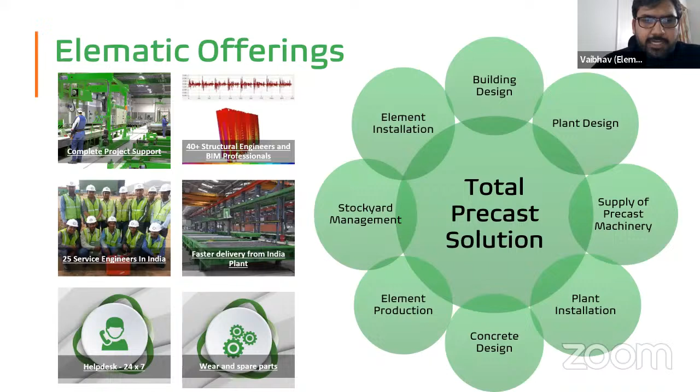And the core machinery with respect to the technology part, where it's a concrete distribution system or an element distribution and transportation system, that technology part is coming from Finland. In a combination of technology and the mold, we are supplying the total precast plant to the customer. And obviously, we also have a 24/7 help desk and other after sales support as well.

So in India, we have engineering and BIM offices in Gurgaon, Pune, and Hyderabad. In Gurgaon, we have the office, and in Pune and Hyderabad, we have team members who are working from home. So we have a presence of the design team in these 3 locations. Marketing presence as well in Delhi, Bangalore, and Hyderabad. And that way we are able to cover across India. And the plant is based in Alwar, Rajasthan. Also our service team and supervision team is stationed in Delhi and Pune.

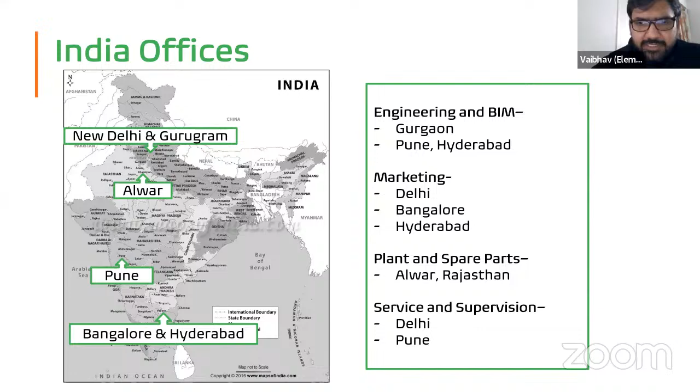So as a design team, for any building to be a good design, to adopt the technology in the right way, it is important to have a strong structural engineering team behind this. Our design team, who are major lead structural engineers, are all graduates and postgraduates from premium colleges like IIT. Together we bring 40 plus years of industry experience, especially in precast. So that's how we are able to serve the customer.

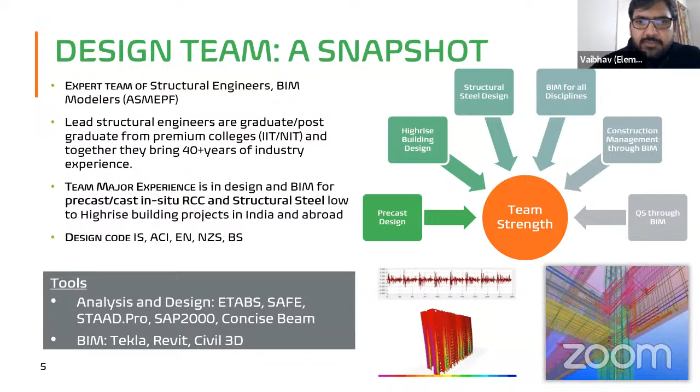Our team is also doing Indian projects as well as overseas assignments. And we are all equipped with the latest technology and the software licenses. So we are doing precast design services and BIM services. Other than the precast, we also provide the BIM services for the project.

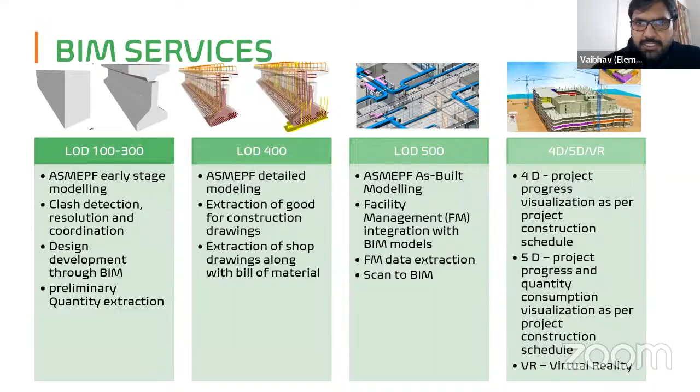Now that was all a brief about the company, what we are doing and how we can support our customer. I'll come to the precast solution that is available and how anybody can adopt precast for the project. So let's understand this precast concrete. As a precast, there is offsite manufacturing.

Broadly, we can divide this activity in 2 ways. One is the offsite, the other one is the onsite. Now in offsite, we are producing all the elements for the buildings. These are all load-bearing members: column, beam, slab, staircase, wall, all being produced in the offsite setup. That is your precast plant. So you're producing those elements there, curing them there itself and storing them for some time. Afterwards, you're transporting those elements to the site, and then the installation is being done through the cranes, and then the building is finished. So these kinds of 6 stages are involved in precast construction.

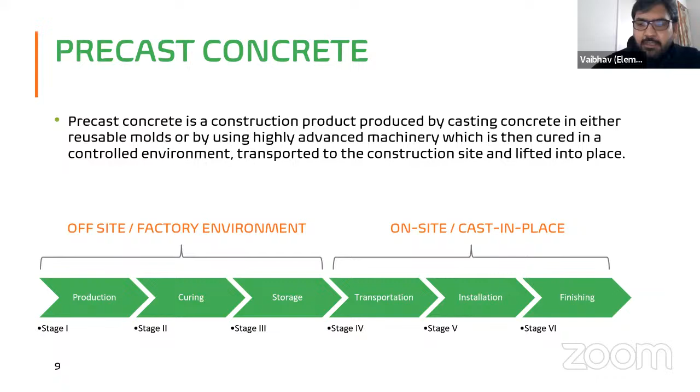Now, typically this question always comes to mind: are there any limitations with respect to precast? I would say there are no limitations in terms of what kind of project it is, whether it is a residential, commercial, or industrial building, mid-rise, high-rise, or in public works. We have been seeing this for more than 10 years now, that in all the metro projects, it's already being utilized. So precast has got no limitation.

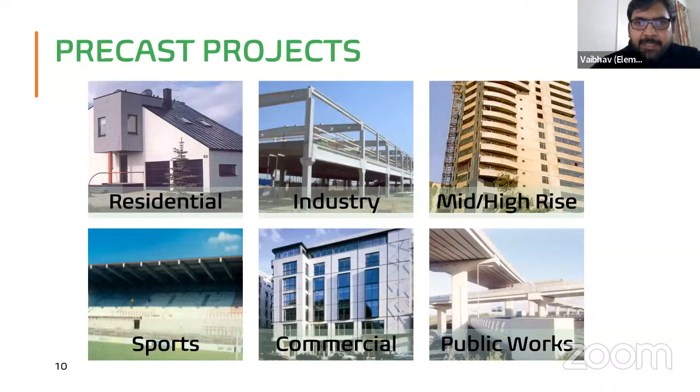It's all about what kind of plant setup and capacity you have. Then it's also about what kind of crane capacity you have at site, and the logistics part of it. As far as these 3 things are taken care of, you can do practically any building with precast, because in terms of engineering, we can design any building with precast. All the connections can be designed accordingly, and any project can be done with this kind of technology.

Now moving forward, typically if we divide the projects, we can simply say there are projects which are residential or which are non-residential. We make this differentiation because in residential projects, you'll see that there are a lot of infill walls. That's what makes them a different type of design solution, because we want to take advantage of those walls as a load-bearing member. So rather than going with the column beam slab system, we can make the same infill walls a load-bearing member as well. At the same time, that will also act as a partition.

So in all the residential projects, the suitable precast system is that we go with load-bearing precast wall, then we have precast slab, and then staircases. And majorly, you would only need these three elements to do the residential building in precast.

And the facade of the residential building is also one of the characteristics of a residential building, that you have to have a facade which doesn't require too much maintenance over the period of time. Because after 5 years, 6 years, you see that conventionally in some projects, plaster is falling off, or the paint has gone bad. So you have to do the repaint, you have to do a lot of repair work. So this kind of facade can be done as an inherent part of the precast element.

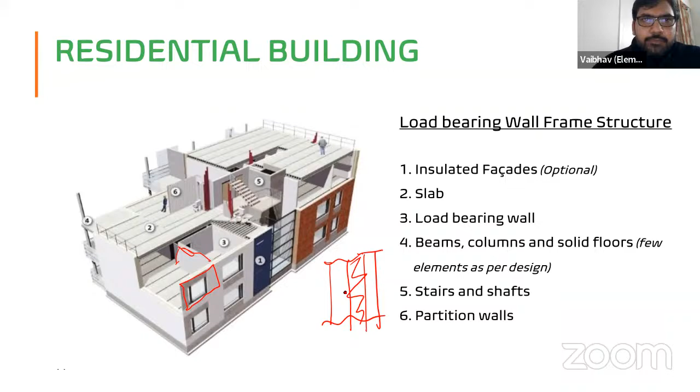So that was about residential. Now with respect to non-residential buildings, it's about column beam structure. If I talk about an office building, typically my column to column span is varying from 8 meter to probably 11 meter or more. So that is the trend that is happening in all the commercial buildings and office buildings.

So in this kind of architectural requirement, we go with the precast column, beam, and slab system, where one solution is that I can provide the lateral support with respect to all the earthquake forces and wind forces by the central core, or wherever I have the walls available. So generally in a commercial building, you'll have a lift core, you'll have a staircase core wall area, and those walls basically will take care of all the lateral load resistance for the building.

And I can design my column and beam where the column is precast, the beam can be precast pre-stressed, and then I can have the hollow core slab again spanning 8 to 11 meter or more as per the project requirement. So this slab, beam, and column system would be purely designed for gravity load transfer. And for lateral load, I am able to take care of 100% of the lateral load by the central core or by all the shear walls that are available in the project.

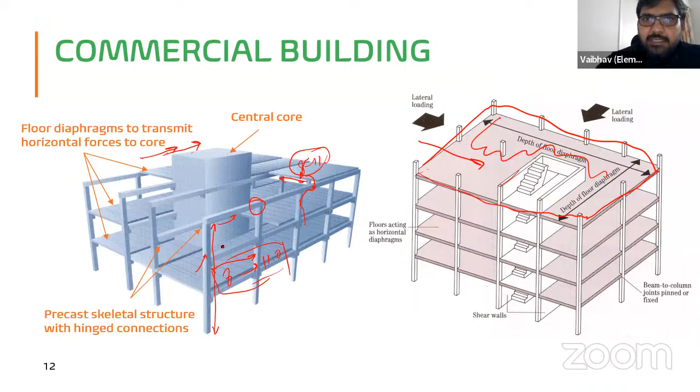Now, other type of building, other than residential, non-residential, we can say they are industrial building. I mean, there have been a lot of demand for this kind of projects where there is a warehouse project or a factory project. Typically, these are being done with PEB structure in steel, and the pure reason to go with steel is because of speed of construction.

So even those kind of buildings which are actually single story, but their characteristic is that they are like 10 to 12 meter kind of a high single column. And when we want to do it with conventional cast in situ, obviously the formwork and everything becomes too complicated, and we are not able to achieve the speed of construction. But this kind of a buildings can be very well done with precast solution.

So one solution is that we do 100% precast right from foundation till the roof, where there could be two ways of doing it. One is that I can have again the perimeter of the warehouse or the industrial building with the load bearing wall. Below also I can have precast foundation, pedestal, and beam kind of a structure, or I can have a precast strip footing divided in pieces, and then I can start my pedestal wall, and then from there the load bearing wall. And internal I'll have again column beam structure with the span whatever is required. Generally this span can be again probably around 16 meter or so.

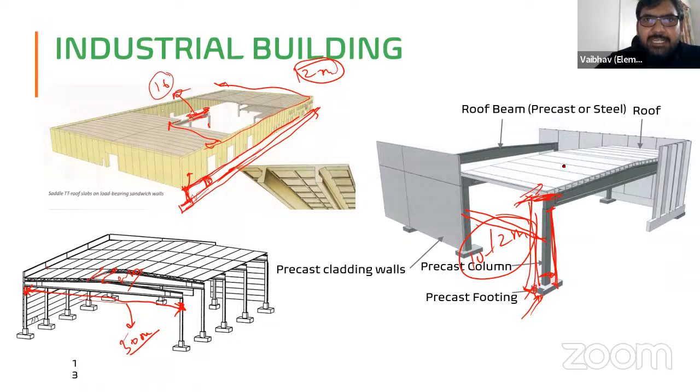So typically, if you see, we have talked about all kind of building projects, and you'll see that in all the building projects, my type of element is only 5, so to say. So one is the slab, other is column, then we have beam and wall and staircase. So you just need 5 elements. And the precast factories are not really project specific, because this is also sometimes a notion that do I have a factory only set up for a project? No. You can utilize your factory for any kind of building project.

Eventually you're going to use these 5 elements, and these 5 elements' molds are quite flexible, and this flexibility provides utilization of same molds for various kind of projects and various size of buildings and elements. There might be some restrictions, like with respect to staircase, you might say that, okay, this tread and riser I have to fix, but number of steps can be variable. So those kind of slight limitations would be there, which have to be thought through. Otherwise, there is a lot of flexibility.

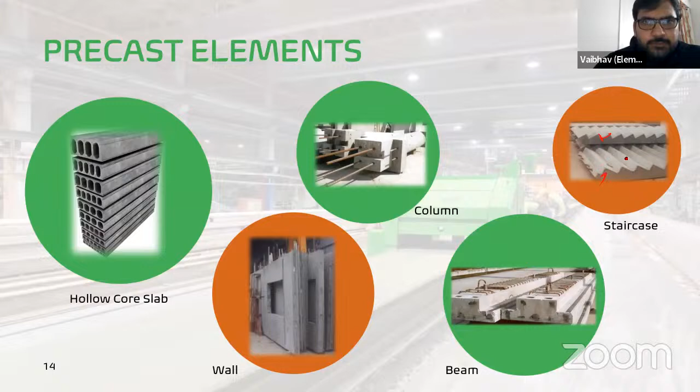Now, with respect to slab solutions, we can typically divide precast slab solutions into 4 parts. One is the hollow core slab, which I would say is the most advanced slab solution to date. This is basically a pre-stressed concrete product where we have removed the concrete where it's not really required in a slab. So we are making the slab lightweight, minimizing the concrete consumption as well as the steel consumption with the pre-stressing. So the hollow core slab is a wonderful product which can be utilized anywhere.

Then we have a double T slab. Double T slab is, I would say, a combination of a thin slab with 2 beams, as you can see. This is also again a pre-stressed product and can cater to up to 30 to 40 meter spans as well.

Then another solution is the half slab. Now, with respect to half slab, it can be a normal reinforced half slab, or it can also be a pre-stressed half slab. You can consider this as half precast and half cast in situ, which is done at site. So this bottom precast portion also acts as a formwork. We just have to place some props below the slab while we are doing the balance cast in situ half at site. This half slab solution is utilized quite commonly in residential projects, where you want to go with the room size slab concept, where practically all my walls are load bearing walls.

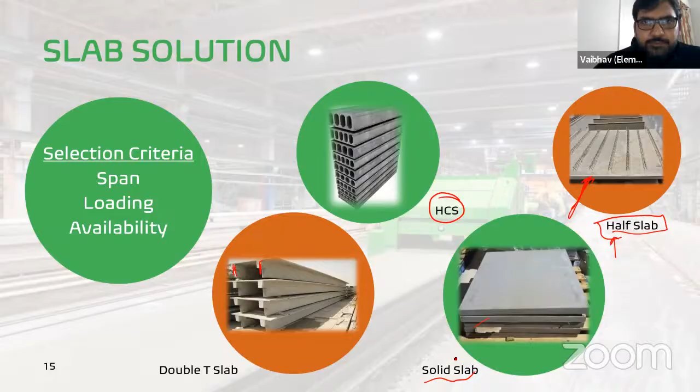So this was all about the structural scheme, the kind of precast elements that are required. Now I'll touch upon the connection part, because that is also quite a common question in everybody's mind, how these connections are and how they will behave. First of all, before I get into this in detail, I want to explain that all these connections we use are tested connections in the laboratory. They have been tested in the US, in New Zealand, and most of the connections are now also being tested in India. And it has been found that the performance is either equal to or better than cast in situ construction.

If I divide these connections in terms of their load transfer capacity, we can term them as a moment connection or as a hinge connection. And accordingly, as per the analysis of the building, we have to see the amount of forces that is coming, and we have to design these connections. But in terms of detailing, these details are quite well known, and they are given in the literature and in the codes as well, and that's how it's being followed. And these have been tested.

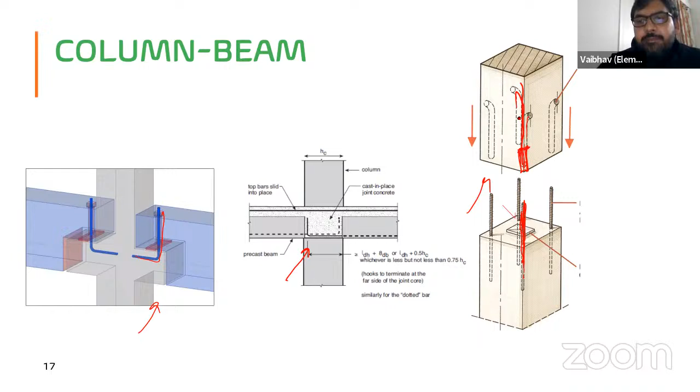Then this is one connection detail where column to column is being connected. The bottom column has reinforcement projecting out, and that goes inside the column above, which has a dowel tube. And then this connection is grouted with non-shrink grout. So this is a typical connection detail for column to column. Now this can also be replaced with a grout-based coupler, where I can have similar dowel reinforcement coming out from the column below, then a grout-based coupler, and then a bar starting again.

Then with respect to wall to slab connection, it is also similar to what we have seen in the column to column connection: there would be reinforcement coming out from the wall below, and it goes inside the dowel tube above. And at the same time, we have to connect my wall with the slab diaphragm. So in all these slab solutions, especially for any structure which is more than 3 stories, we have to mandatorily have this RCC topping, which is also mandated by the code.

So this RCC topping is also acting as a diaphragm for my floor plate. This diaphragm is connected with the reinforcement coming out from the wall. There is one reinforcement bent inside the diaphragm, and this is how the slab and wall is connected.

So in this connection detail, if you see, this is an external wall connection. You have a wall to wall connected through this dowel tube system. One reinforcement is bent inside this, and then this gap is filled with the grout, and on the exterior we have to put

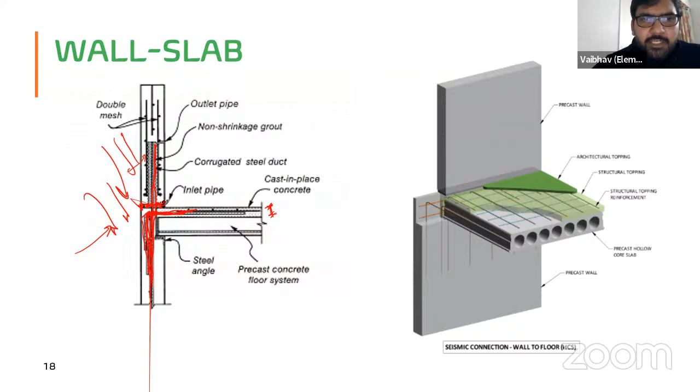backer rod and sealant. So this sealant is basically for protection against any possibility of seepage because of heavy rain and all. So you can see that there's a sealant, then there's grouting done. These two things really eliminate any possibility of water intrusion.

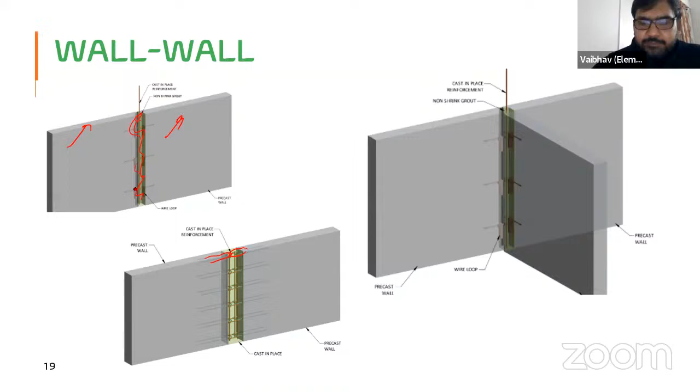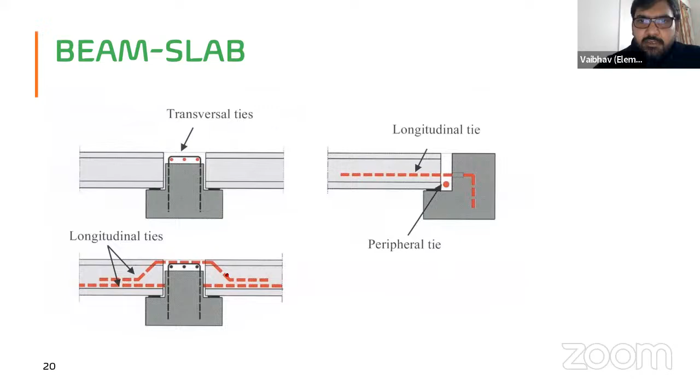So the whole purpose of showing these connections to the forum is to understand that all this precast design information and knowledge is available. It's already given in the Indian codes as well. There are some mandatory requirements which we all have to follow, and that's how we ensure that the building is behaving as good as a cast in situ building, or even better in terms of any kind of seismic load situation, or also the smooth transfer of gravity load.

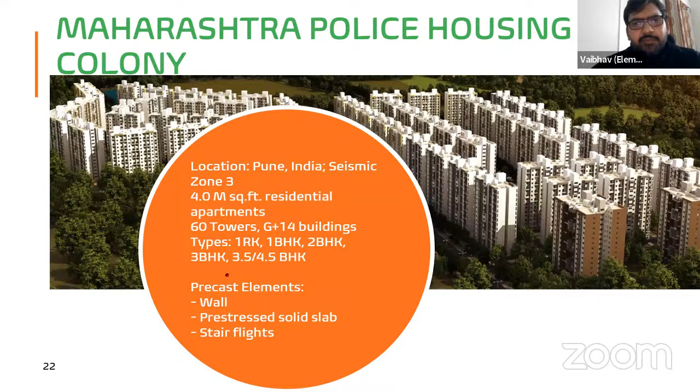So now I'll show you some precast project examples in India. This is one example from Pune, where there are 60 towers, 4 million square feet of residential apartments. You can see photos. It's a Maharashtra Police Housing Colony. Unfortunately, the project is not completed yet because of some issues with respect to the site and all.

But otherwise, this is the project photo taken when the project was moving at full speed, and you can see how the construction is happening at site. You can see hardly 10 people at site actually doing the installation of the wall. So basically, if I explain the residential precast solution again, this is my load bearing wall which is being installed here, and I have this dowel reinforcement coming out which goes inside the wall panel, and then it's filled with the grout.

And then this is where I have one-way precast slab, which you can see here in this photo, where this slab is coming and resting on the wall. And then in this entire area, the RCC topping is done. And then you keep repeating the same sequence. Theoretically, you can achieve a 3-day slab cycle for residential construction, but practically people are able to achieve a 6 to 7 day cycle with precast construction.

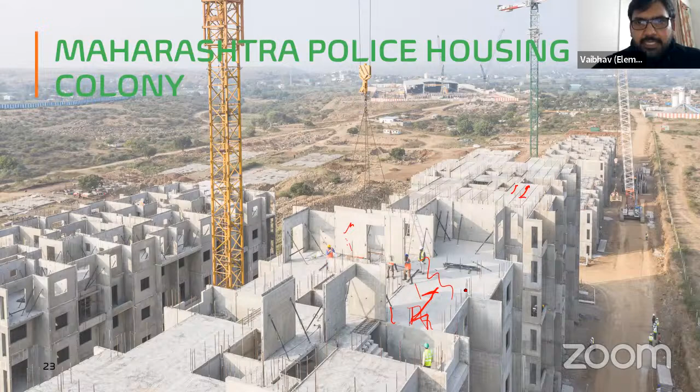It's a closer look of that installation, and all your electrical conduits and everything would be pre-embedded. With respect to floor conduits, we are placing those floor conduits in the topping itself. You can see this is the topping thickness, you can see from here. So all your electrical conduits in the floor are embedded inside the topping, and the wall conduits are embedded in the wall.

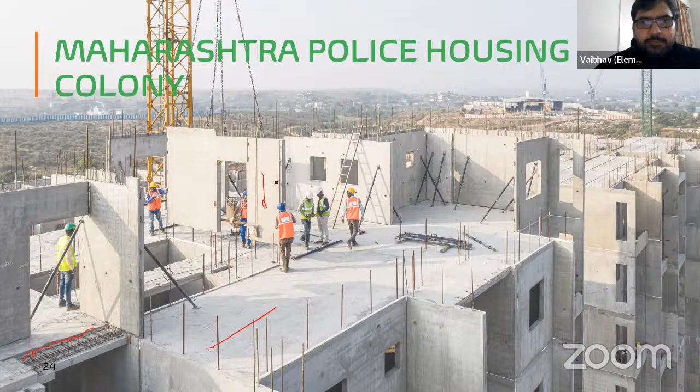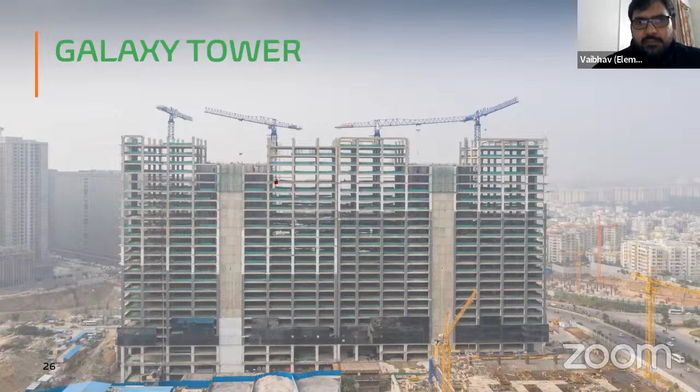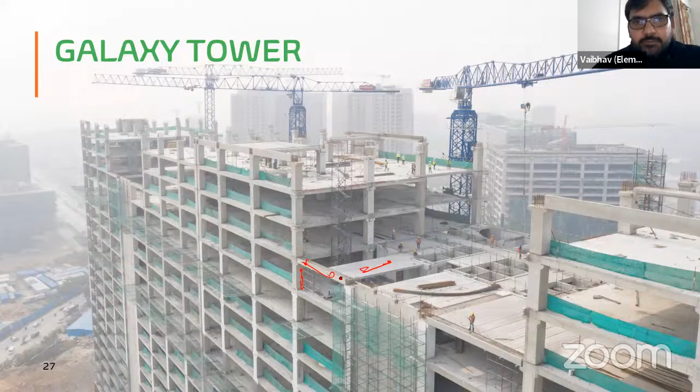So this was an example for a residential building. This is the Galaxy Tower. This is a finished building. The project is already finished. It's leased out, and tenants are already utilizing this property. This one is a precast column beam structure, where the single-story precast column, then precast pre-stressed beam, and hollow core slab is spanning from beam to beam, and then RCC topping is done on top of it. So this building is already finished, completed.

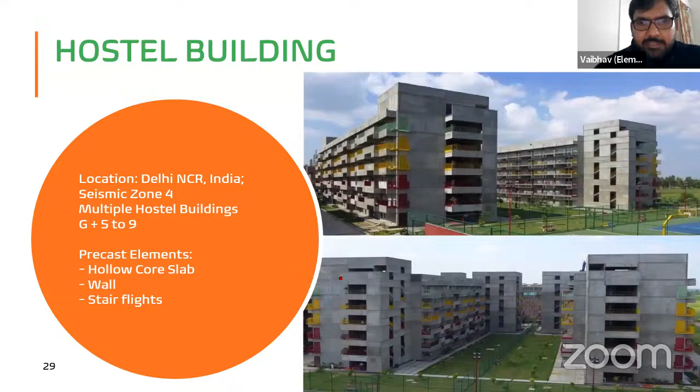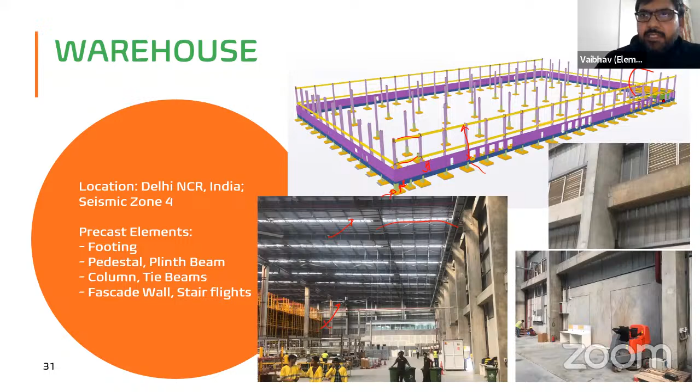And all my internal columns, everything is precast. So only the roof part, which is lightweight, we kept as steel structure, and the rest everything is done in precast, including the mezzanine floor here. So that's all on the precast solution with respect to various buildings.

I have one video to showcase before I end my presentation. This will give you a feel about mechanization of structural elements. So I'm going to run a small video. It's almost an 8-minute video on how hollow core slab production is done. You'll understand what kind of automation is happening in this kind of element production, which really increases the speed of construction, optimizes your cost of production. And this is definitely a revolutionary product.

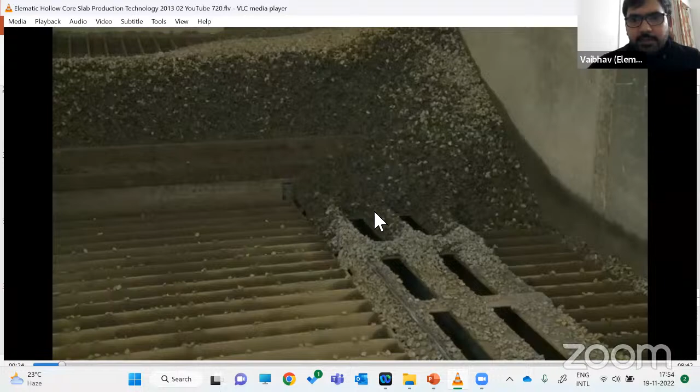You're showing the video now, sir. Yeah. Vaibhavji? Yes. Are you showing the video? Yes. You're able to see the video, right? No. Sorry. Mr. Siddharava also said that they can't see any video. I thought you had to show it. When you were talking, there was no video. Just a second. Let me. Now you are able to see the screen? Yeah. Take it back. The starting part, yeah.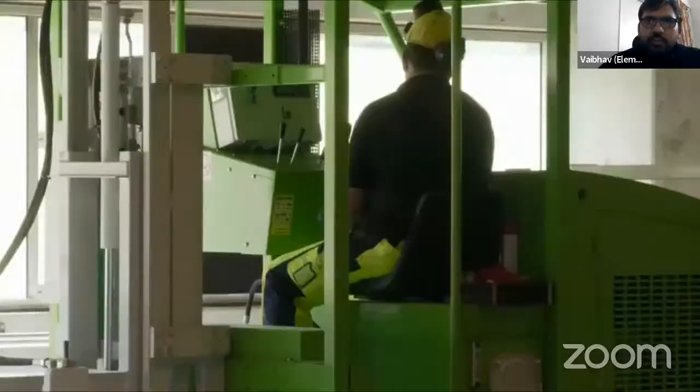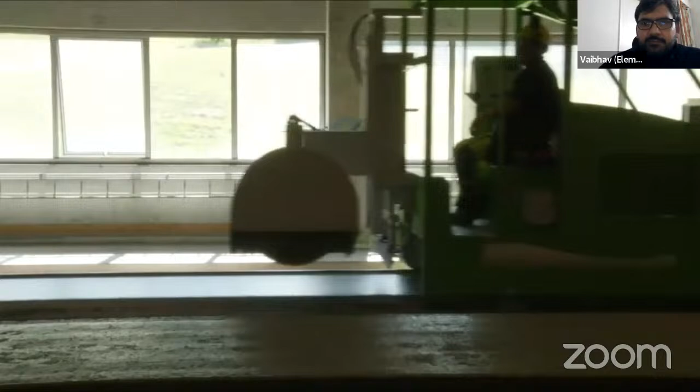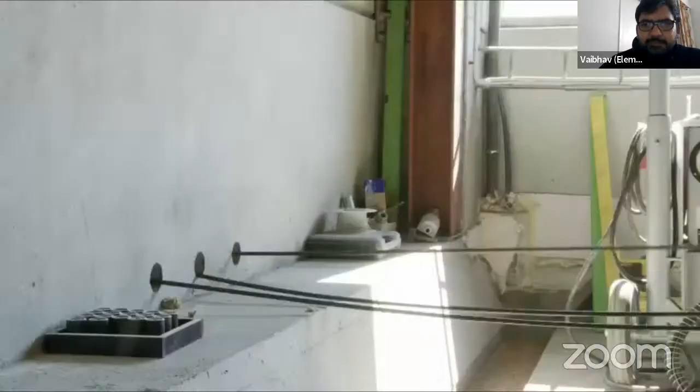Okay. So this is basically zero slump concrete. You can see how this batch is prepared. So it's just showing a zero slump concrete. I'm saying that this hollow core plant is a long line casting where the width of the hollow core bed is 1.2 meters. Now this machine is cleaning and oiling the bed, and afterwards is pulling the strands. Right now it's just cleaning and oiling the bed, and then the same machine is pulling the strands. One person is doing this activity utilizing this machine. We call it a bed master.

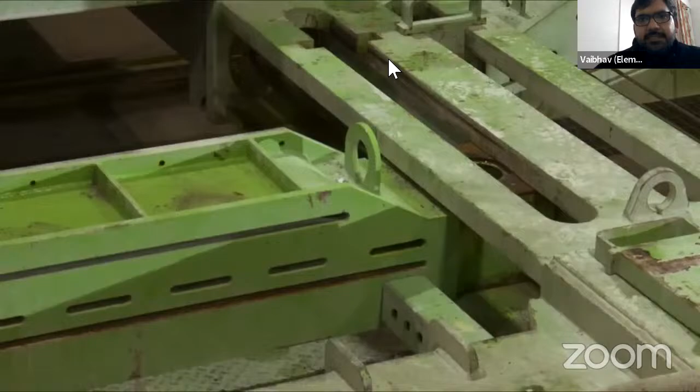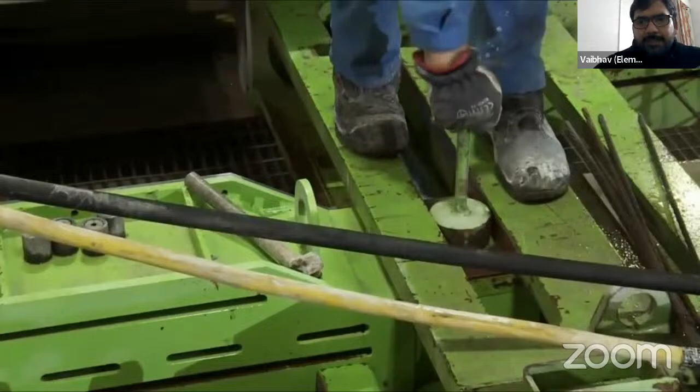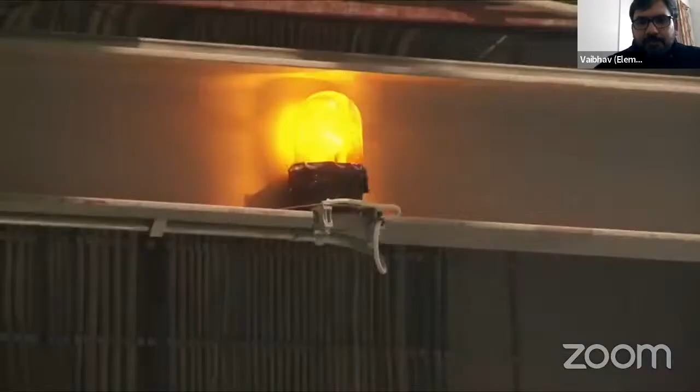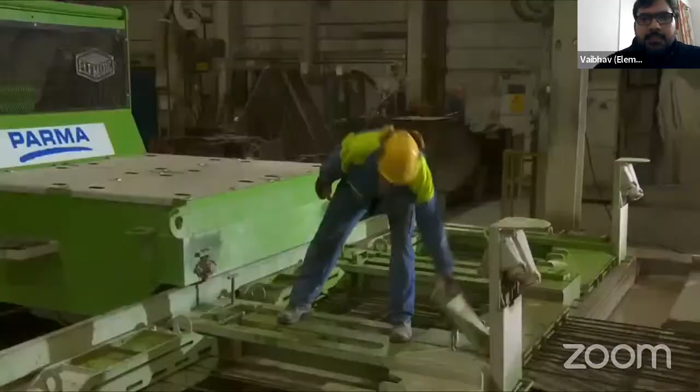You get the strands in coil form. You're able to pull them. Then we have a multi-stressor. This multi-stressor stresses all the strands together. So if you have 4 or 5 strands in a hollow core slab width of 1.2 meters, all these strands are stressed in one go. You don't need to stress them one by one. And then the pre-stressing starts. Once the stressing is done as per the required force, then we lock this pre-stressing abutment area.

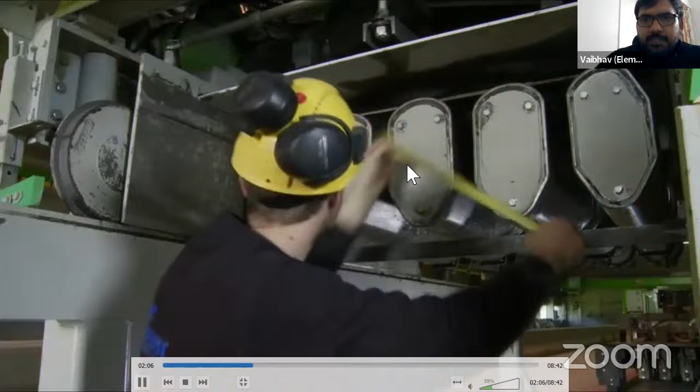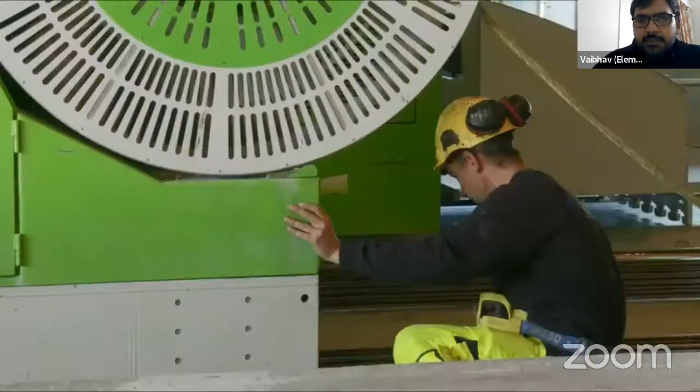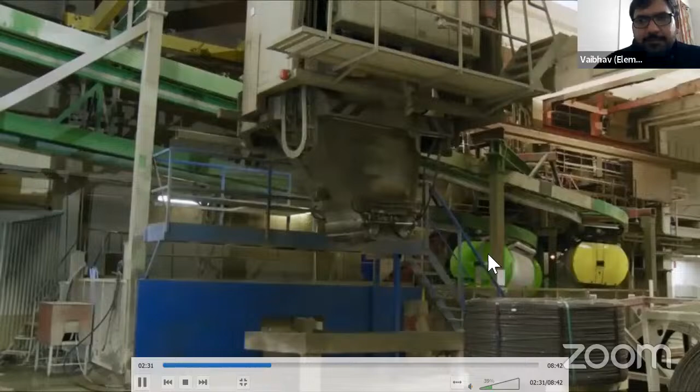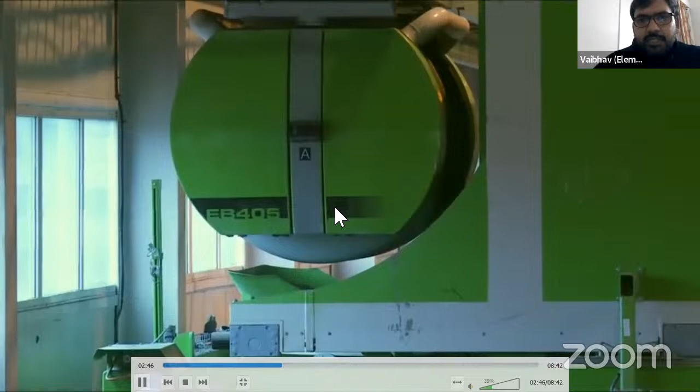Now this is an extruder machine, which will extrude the entire hollow core slab, and it will keep on casting this hollow core slab. So it is self-running. Once it starts, it will finish the bed in less than 2 hours. Now this is concrete transportation. From the batch mixing plant, this concrete shuttle has collected the concrete and is transporting it to the caster. Now this is the caster, which is transversely distributing the concrete. You can have a number of hollow core beds, and this caster is feeding the concrete to the extruder.

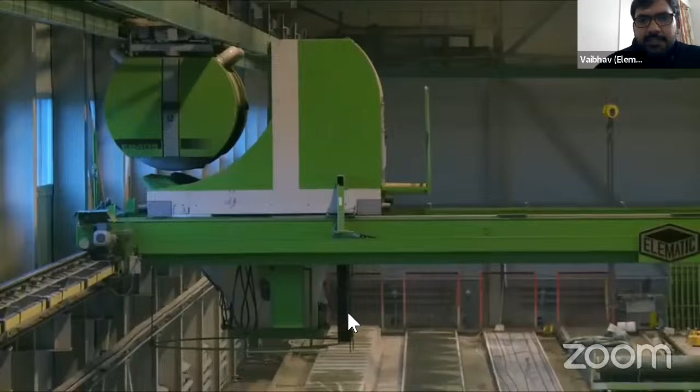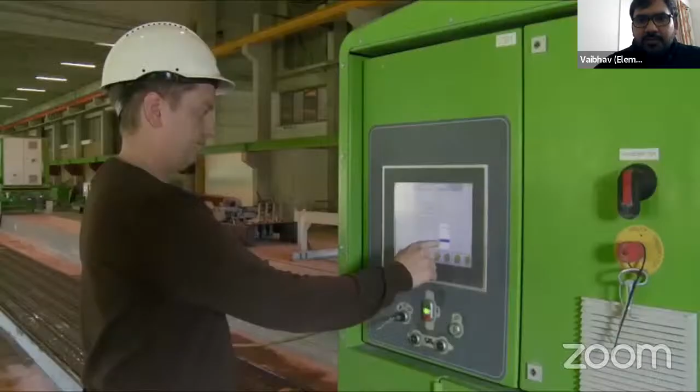So you can see this horizontally is going and it's feeding to the extruder. So you can see there are 3 machines in function. One is the shuttle, other is this caster, and then the extruder. So these 3 are all in sync and they keep on casting the entire bed without any human intervention.

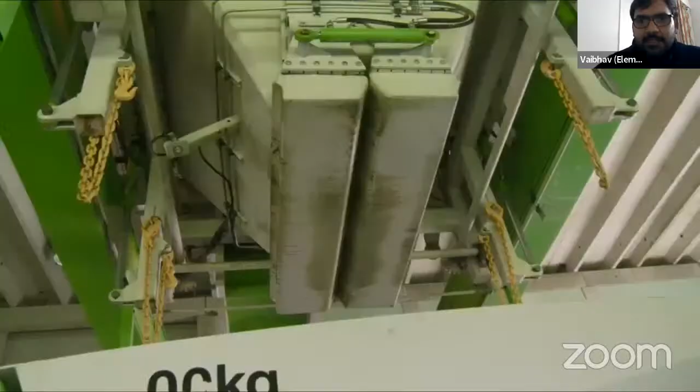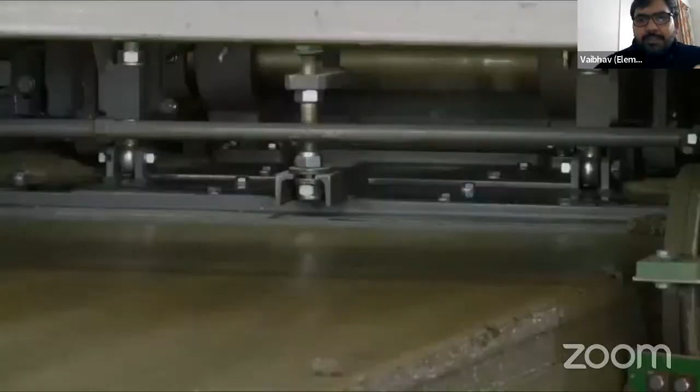So you keep receiving the concrete from the batch mixing plant, and this concrete shuttle will sync with the caster. Caster will move along with the extruder, and this entire process is happening automatically. And you can see that this slab is coming out from the machine like a ribbon, and it's pre-stressed. This hollow core slab just after the extrusion is so strong that somebody who wants to can even walk on top of the slab.

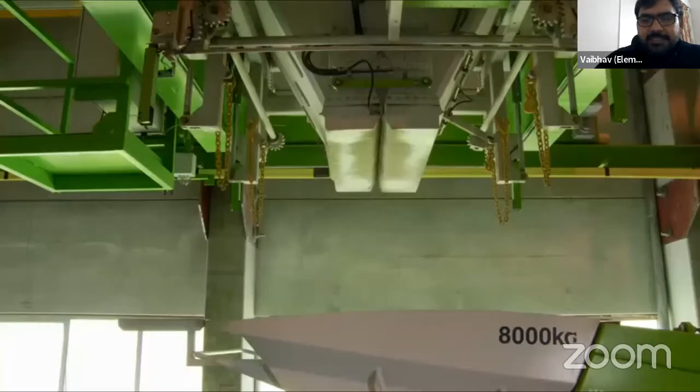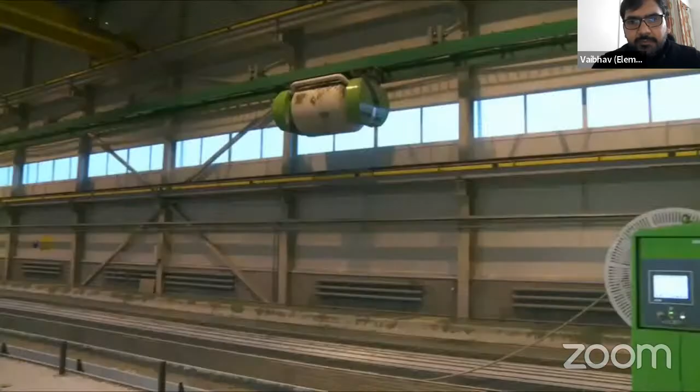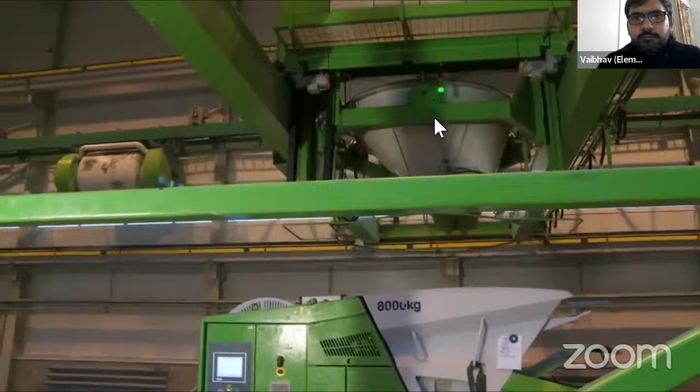So this is how the casting is happening. So in less than 2 hours, you're able to cast a 150-meter long bed, and then you can cast the next bed. So basically, one extruder is able to cast, let's say, 6 beds in a 12-hour shift. So this is how the casting is happening.

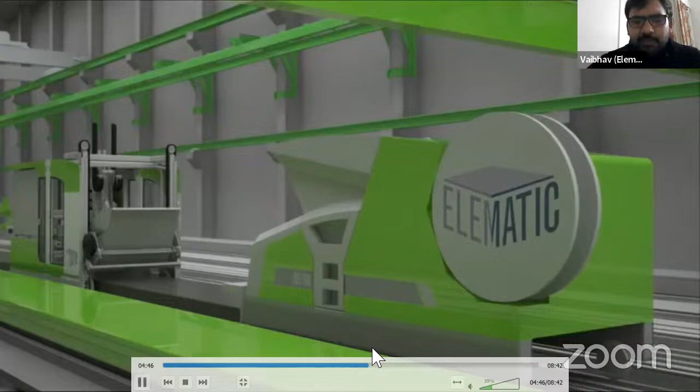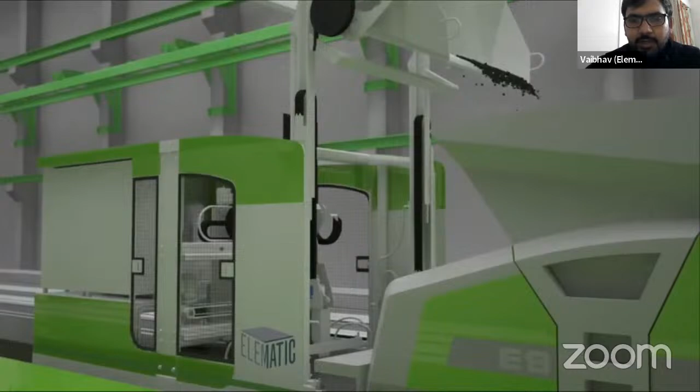Then there's one more machine which can do the modification in the hollow core slab when the concrete is green. Let's say you want to take out some cutout, or as per the drawing, you want to create some modification in the slab. So when the concrete is green, this modifier is able to do this, and it's also able to take that extra concrete back for reutilization, for recycling purposes.

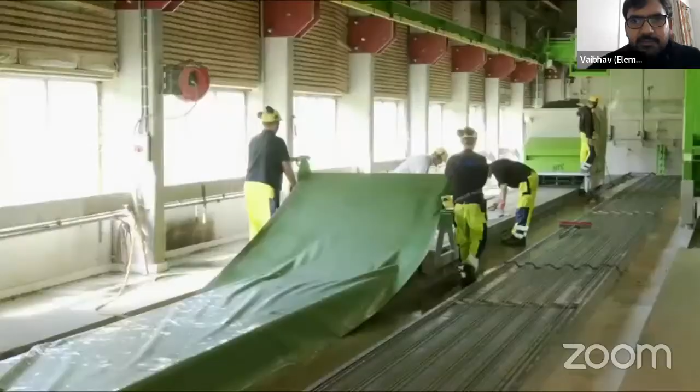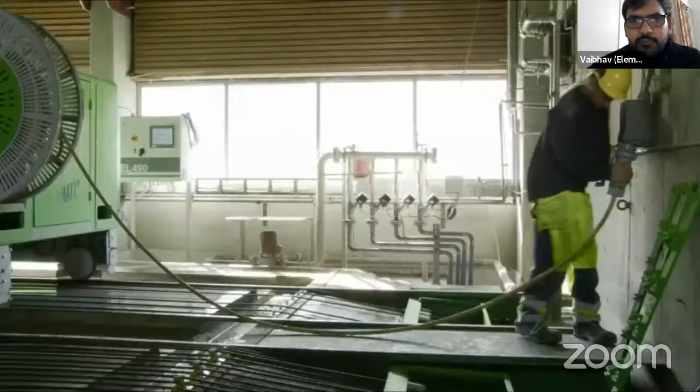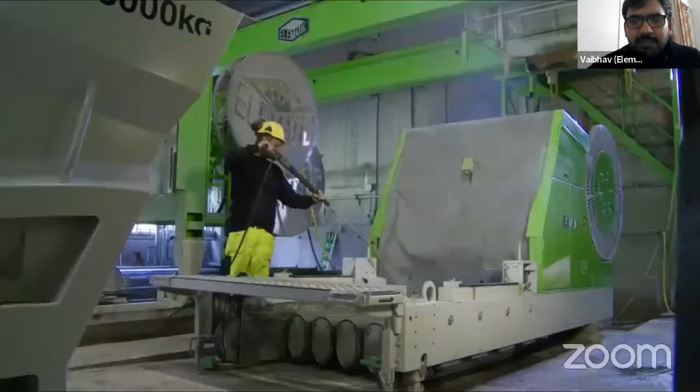Now, once the casting is done, we just put the tarpaulin for the curing purpose. Now, this is also very important: for curing, we have a hot water circulation below the bed, which increases the temperature of the concrete. And with that kind of heated temperature, we are able to accelerate the curing process, and I'm able to achieve the required strength of 35 MPa in 8 to 10 hours time.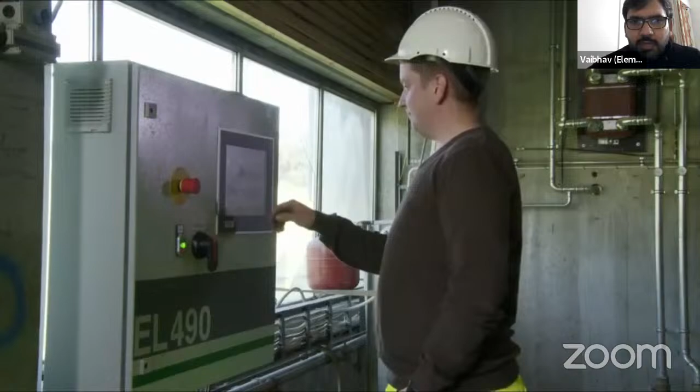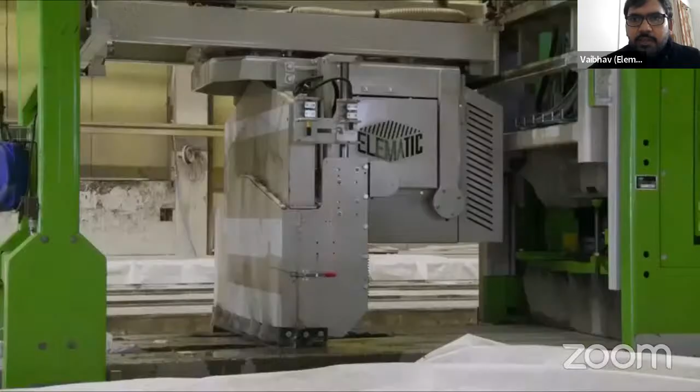Obviously, it also has to be done with respect to how the concrete mix is designed. But with the heated water circulation, we're able to increase the temperature and do the faster curing. Now, once the curing is completed, we are in a position to cut the slab. So now this slab is cut as per the length requirement. If I need a 6-meter length or 8-meter length or 4-meter length, as per the design, I'm able to cut this slab.

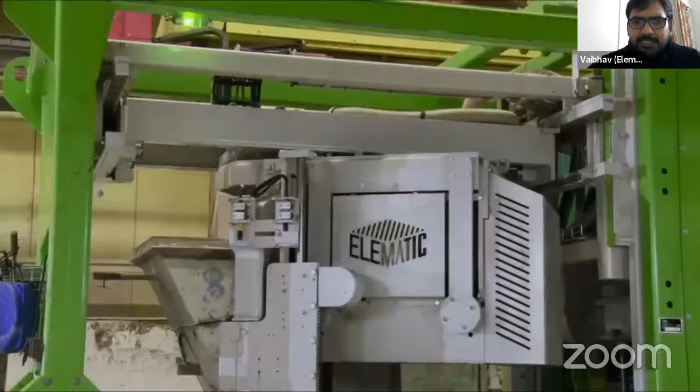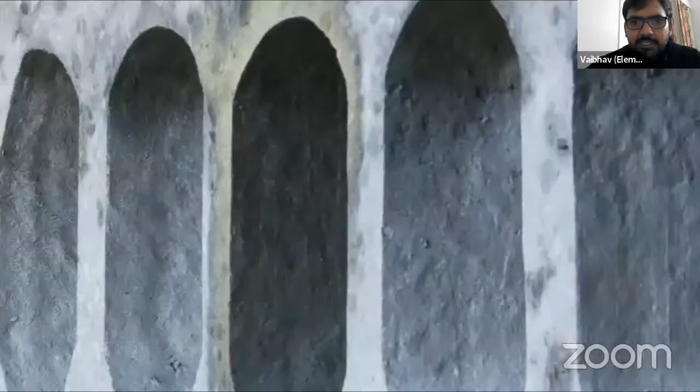This is a 360-degree cut, which can cut the slab in any direction of any shape. This is the cutting machine. And then after the cutting, you can see that the strands are just flush with the concrete surface. That shows that there is no slippage in the slab, and then the slab is good to use.

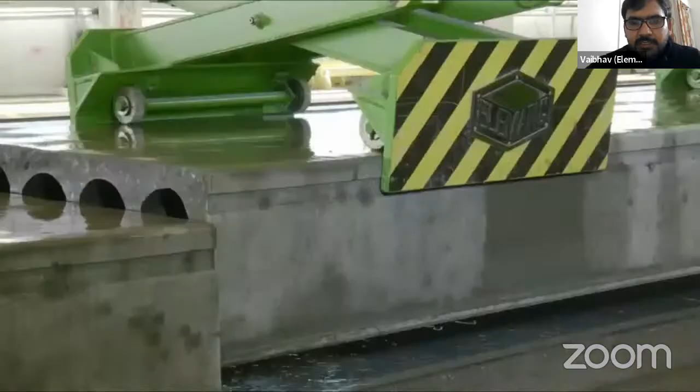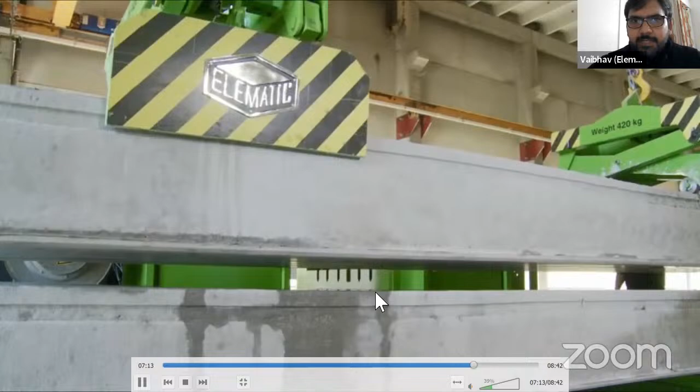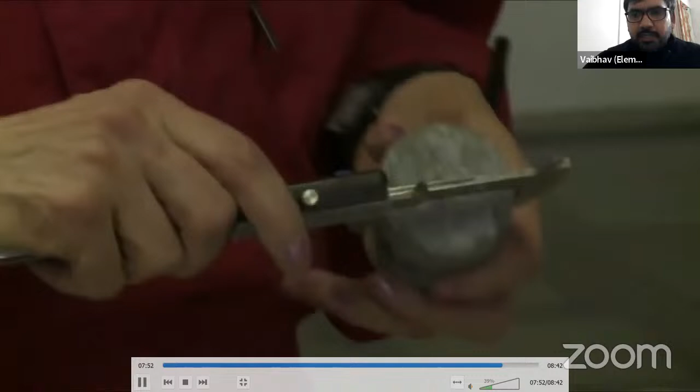So after this, you just take the slab and put it in the element transportation system. So this is my element transportation wagon. On top of it, I just put the slab, and then the slab comes out. For quality check, we can also do a core cut in the slab in some of the samples and check the crushing strength of it. Then we understand what the strength is.

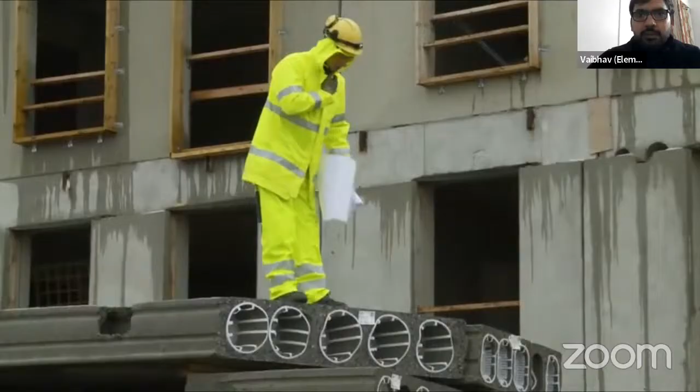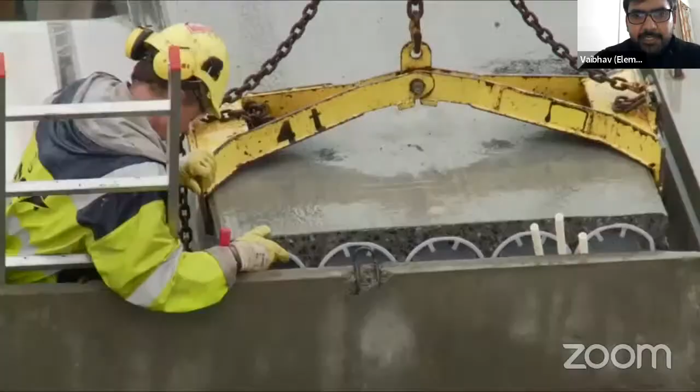And then the slab is utilized for residential projects or commercial projects or industrial projects, and you just place this kind of stuff. So it's a very versatile product. 1.2 meter width, length can be as per project requirement. And this is easy to transport as well.

And this entire plant only requires 10 to 12 people of staff to produce, I would say, a million square feet of slab every year. So that kind of level of mechanization is possible, and it's already happening in India now, where Elematic itself has supplied more than 35 precast plants, small and big. So that's it from my side. Thank you all. Thank you for giving this opportunity to present this solution. Thank you.